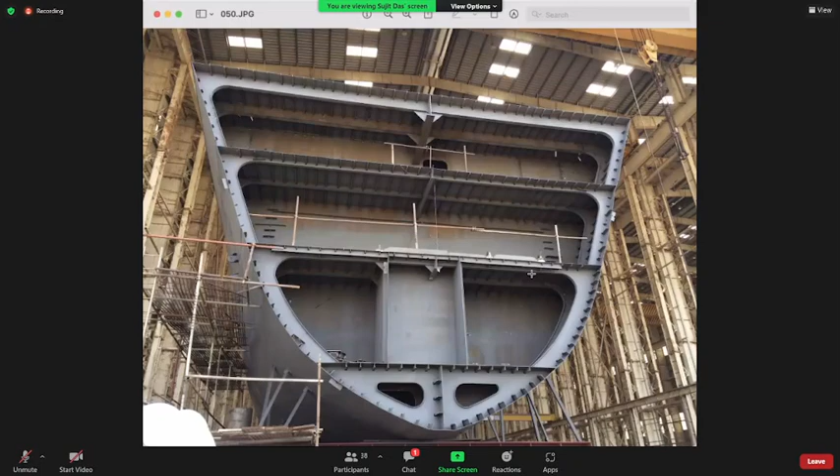Is this picture visible to you now? Yes, sir. Now, try to connect whatever we saw in that particular picture with this. The transverse member shown there is something like this.

Imagine this side shell as a straight bulkhead. If we imagine the side shell as a straight bulkhead, then this is a transverse member, which has moved from the side shell onto the deck. We can have different types of connections where a transverse member connects only the side shell, then a transverse member under the deck connected using a bracket. But in this case, they have taken the transverse member continuous from the side shell under the deck.

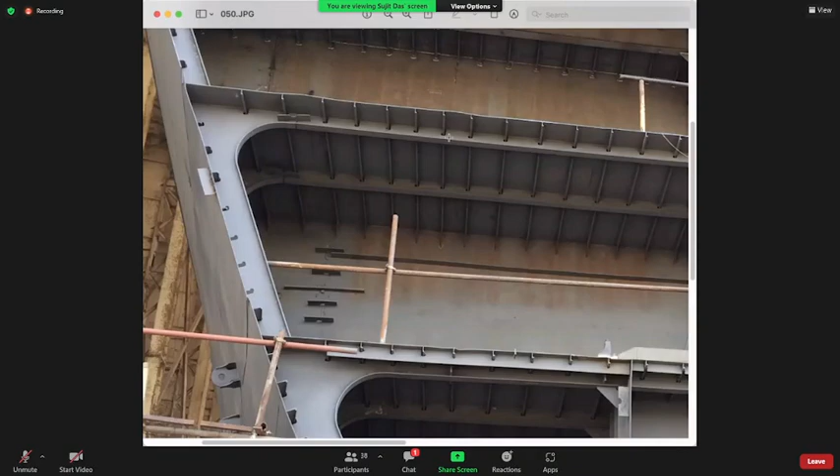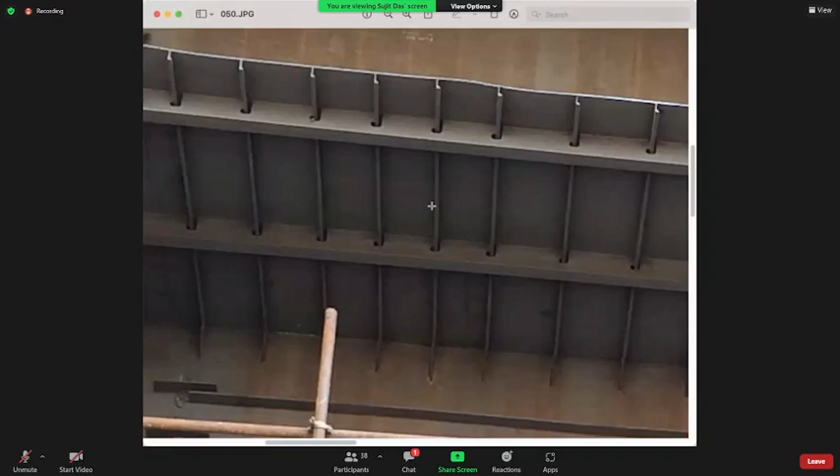Now this is a typical case. Let me show you, this is a transverse member passing, and we have longitudinals also passing, the deck longitudinals which we saw in the picture. So how do they pass through each other? They pass through each other. This we will see in a different unit, but since I have opened the picture, I'm showing you.

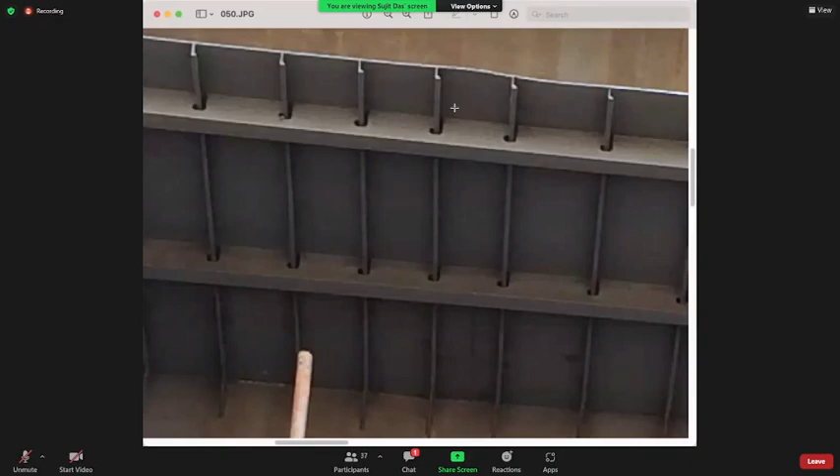The transverse members will have openings in them, called scallops. What other things can we notice here? In this structure, can you see my mouse pointer? Yes, sir. Okay, so this is the deck.

These little ones, I will zoom in, are the deck longitudinals, and the ceiling deck. Similarly for this deck, this is a girder. Now this was a defense class vessel, so it has different requirements. It does not have cargo holds, so it has a slightly different design, but the structural arrangements are similar.

You can see the transverse members. See, this is a bulkhead. This was supposed to be a compartment called an airlock. This is our vertical center girder, which we have shown, and this section is towards the forward side of the ship, which is why the bottom is so sharp. Towards the midship, the section will be slightly wider. So what you are seeing here is the girder, and this is our tank top.

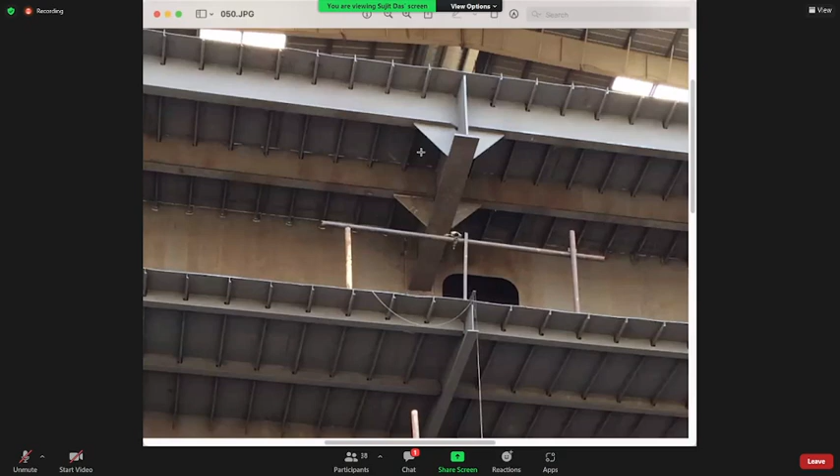Is it clear? Do you want to ask any question about this picture that you're not getting? This is the deck girder. Any questions on this? Do you want me to show any particular location in this? No, sir. Okay, one more thing I should tell you.

Always remember, suppose we have an arrangement like this, a transverse member and the longitudinals are passing through it. Merely having this arrangement is not enough. As we have already discussed, we need to strengthen the components, that is the side shell, the deck, but we have to ensure we have connections between them.

If you notice, you will see there is some plate kind of thing visible here, slightly, not clearly, but slightly visible. That means we have a plate connecting this transverse member onto the longitudinal member. See here also you can see there is no gap, we have connected. This was a block under construction and I took a photo, so everything was not complete, but you can see many details in this also. So we have such connections.

We'll come to that when we talk about bottom structure in the next unit. So this is about it. Should I close this photo? No questions then? No questions, sir.

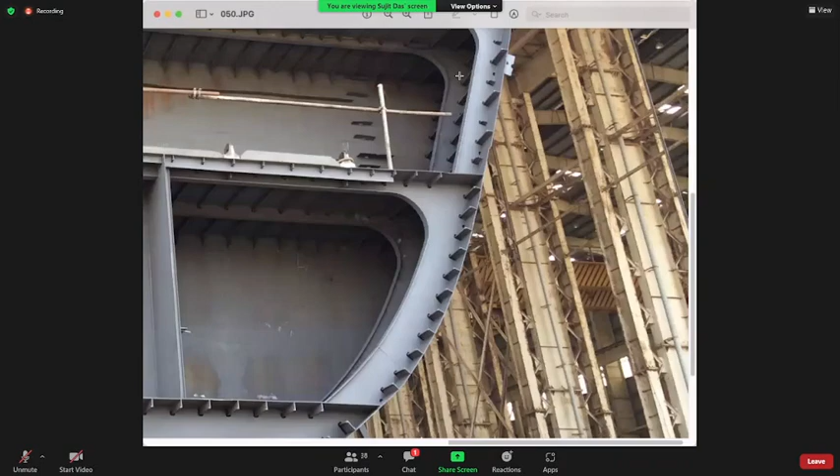I will stop this. Just a minute. Okay, this is what... let me come back to this.

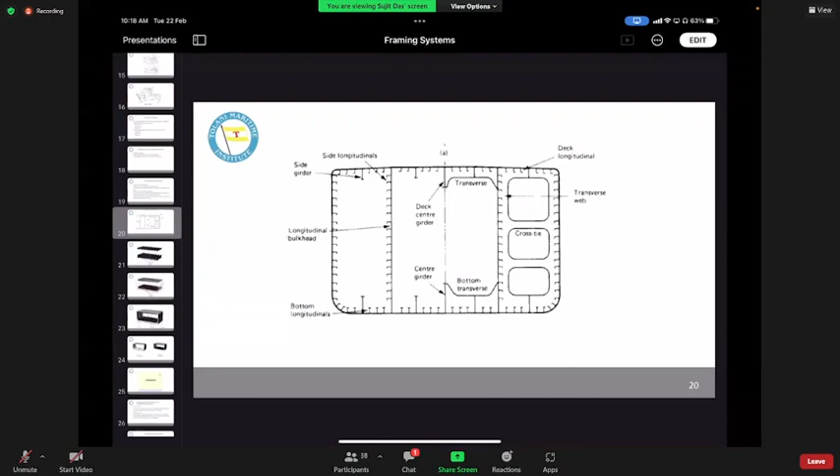So, I hope you are better able to visualize the structure now. You have seen the longitudinals, bulkheads, side shell, deck girders, bottom girders, center girder. Is it okay now? Is there any question anywhere? No sir, clear.

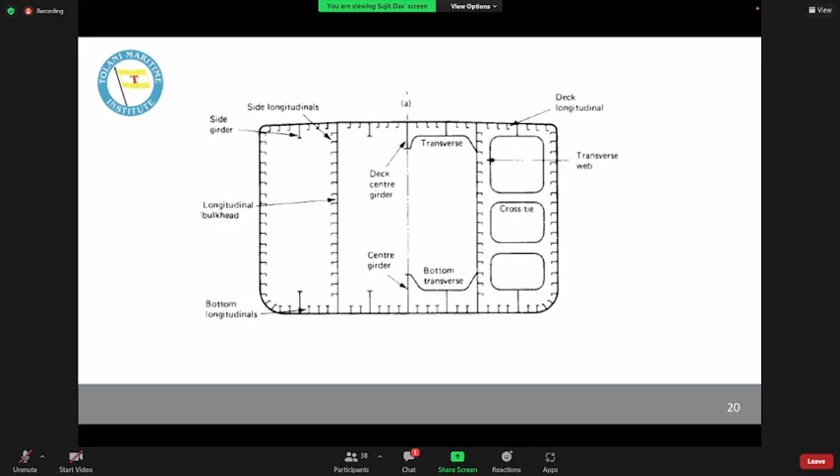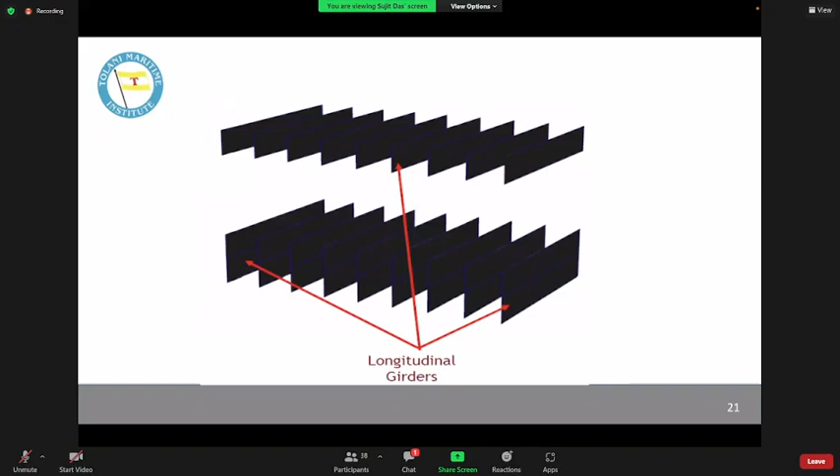Okay, let's move a little forward. Now this longitudinal framing with many girders, this is an approximate representation of it. We have lot many girders, meaning lot many longitudinal members, and to that we add quite a few transverse members. When the number of transverse members is less, they will not all be whole frames kind of thing. They'll be web frames, bigger in size because they are lesser in number.

Always remember this ring kind of structure will be there in all types of ship. Unless you have this ring kind of structure, you cannot arrest the racking forces. So this ring kind of structure will always be there, and in this case you have been shown the side brackets. We will also have brackets coming from the longitudinal to the transverse frame, which will be the beam knees. Though they are connecting the longitudinal member to the transverse, it will be referred to as beam knees.

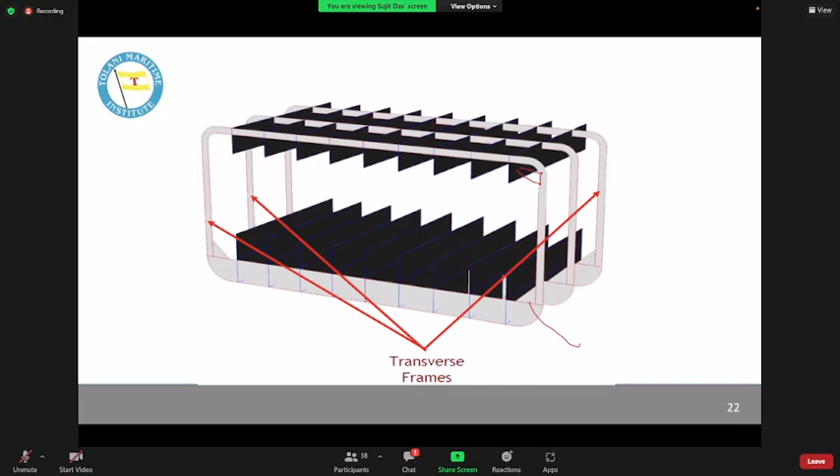So this is a typical representation of longitudinal framing. Now, what all differences did you find in the transverse framing system and longitudinal framing system? Can you point out a few differences between them? At least a few, just general observation. You must have noticed some observations, isn't it?

Yes, please ask. So is the transverse framing system more spacious? We discussed about it now. In case of transverse framing system, we have more bale capacity. Yes, a very good point that you have said. So we have more bale capacity here, let's see. Okay, we have more bale capacity.

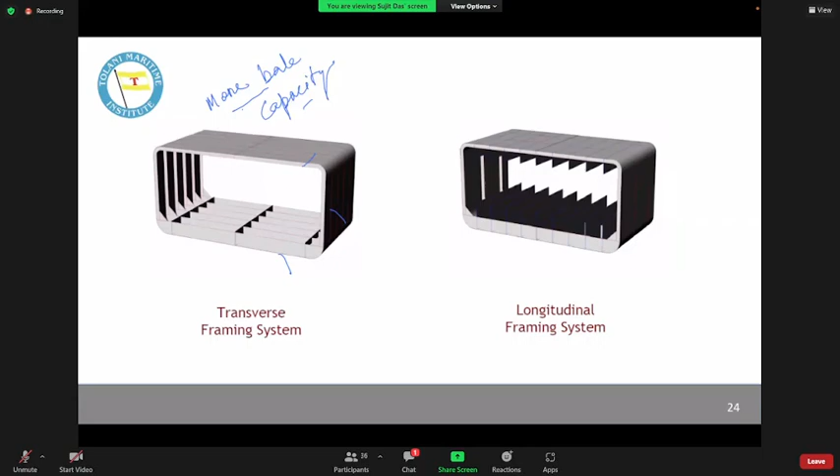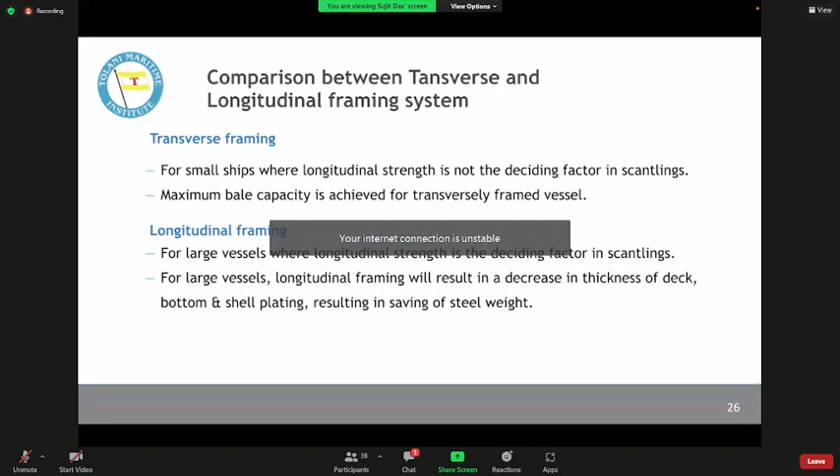So for transverse framing, we can use it most for short vessels, longitudinal for longer vessels, and more bale capacity for transverse framing. And in longitudinal framing, we are having lesser bale capacity. The third kind of category, the combination framing system, originates from this particular problem of reduced bale capacity. When we are making a ship, we always have to remember why we are making it in the first place.

What it does is it implements longitudinal structure or longitudinal framing in the double bottom and under the deck, because those are the long plates that need the longitudinal strength. And for the cargo space, wherever we are keeping the cargo, there we will make use of transverse framing system. In this way, we have taken care of the longitudinal strength required because the long slender plates are the bottom plate and the deck. So the bottom and the deck, we have done longitudinal framing on them, and transverse framing has been utilized for the side shell. This way, we have taken care of the longitudinal strength, and we have taken care of the carrying capacity of the ship as well.

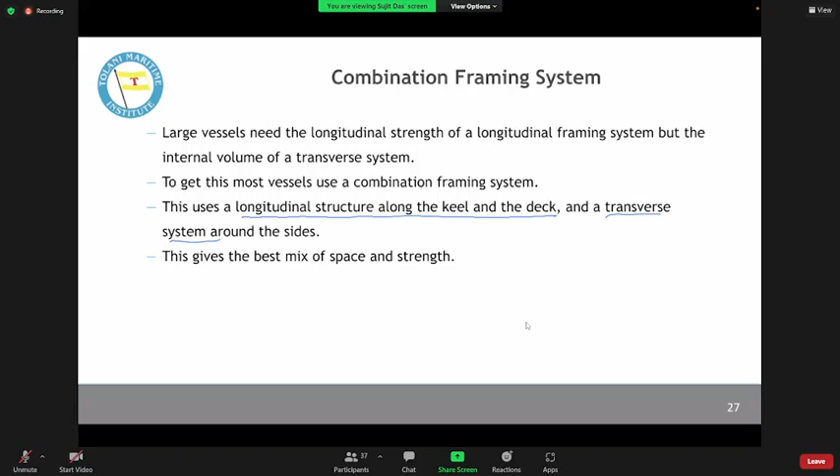This kind of arrangement you will find in case of large merchant vessels, not for the small ones, okay, or the intermediate ones. Let's see what we have there.

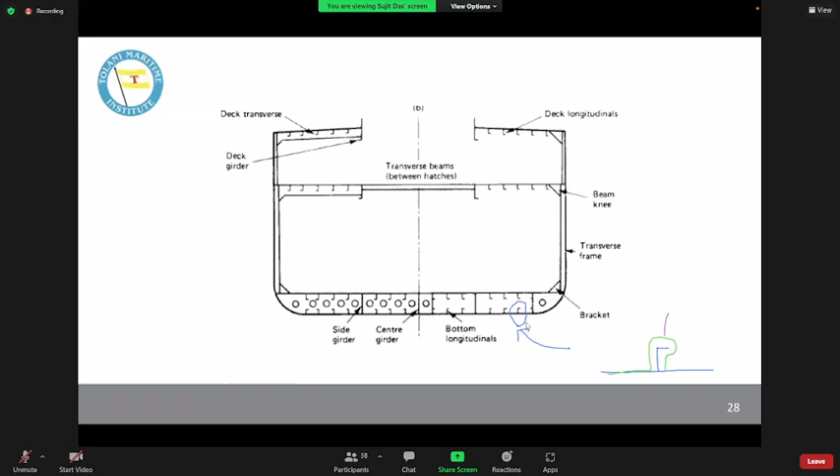Meaning, when this floor was built, it was cut in such a manner that it had a scallop. This kind of design is not very efficient because we do not have a direct connection between the transverse plate, that is the floor, and this longitudinal. What we will do is add a small plate in this manner. This little plate is called a collar plate, and this collar plate makes a connection between the longitudinal and the transverse member.

And this is applicable to all plates under the deck also. One more thing I should have told you - notice they have shown some holes here, but they have not shown those holes here. What is the reason for that?

The double bottom of a ship is utilized for carrying different types of liquids. Sometimes the double bottom, or the floor that we are representing, it may form the boundary of a tank. So as you can imagine, when the floor is forming the boundary of a tank, or the periphery of a tank, it cannot have any openings on it. Otherwise, how will it form the boundary of a tank?

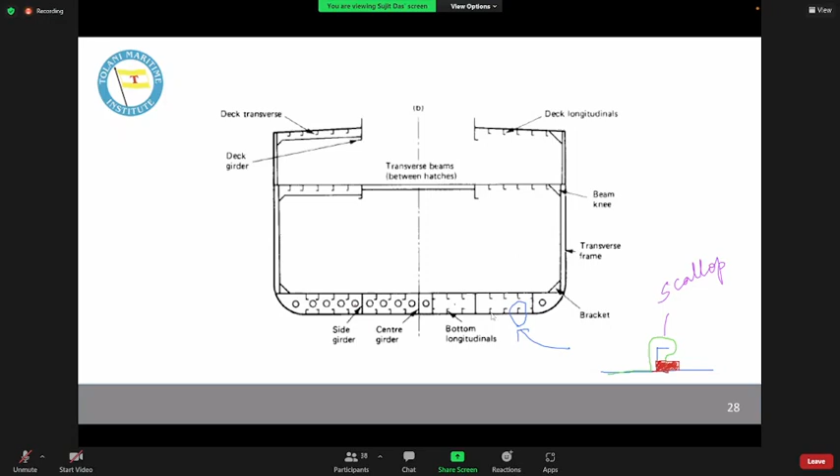In that case, we will not have any scallops or collar plates either. The longitudinals will have to get terminated there. In the picture that I showed, it was visible, I just did not speak about it. Do you want me to show you an example of that in the picture?

Yes, sir. Okay, let me show you that, then we will come to it. Wait... Okay, it is there, let me show you. Share screen. Here, we will not talk about the bottom here - the logic is the same. Let's talk about this part, or maybe this part.

Here you see the longitudinals are passing through the transverse member - they have scallops made for them. But when you look at this particular place, something important is here. Maybe a high fire risk zone on the other side of this bulkhead, which is why we have not made penetrations on this transverse bulkhead.

Instead, you see these longitudinals are getting terminated there. See here also, we do not have openings - we have filled it. Here we have openings. Is it clear?

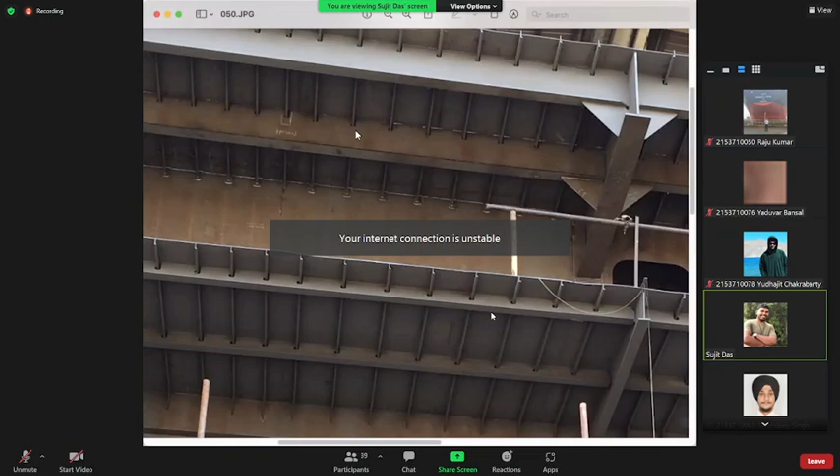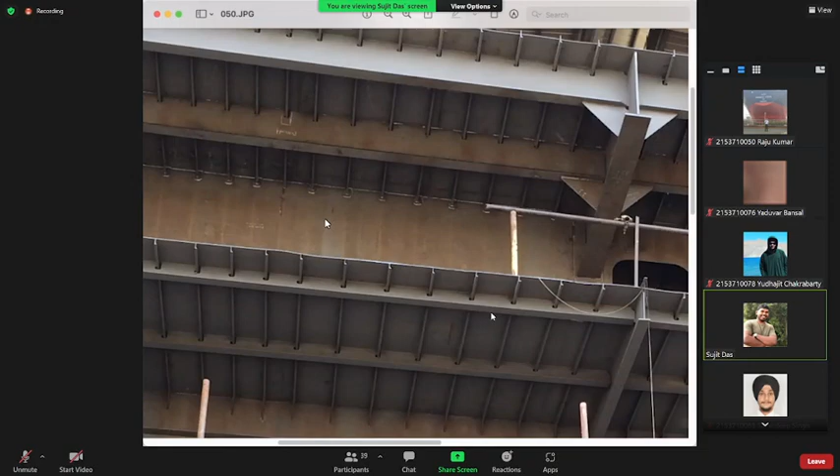And because I'm saying this floor is of this type - a solid one - it has no openings in it, it forms the boundaries, it is called a watertight floor. And whenever that solid floor has only a few openings, like for scallops or circular manholes, it will be called a plate floor. But you do not have to remember that now - it is a topic for the next unit.

The problem with topics in isolation is you cannot say you will study only the deck and not bother about the other members, because the concepts of deck and bottom and side are interconnected. That is why I'm introducing new topics, but at the same time, when we talk about the bottom tanks and structures, that is when we will start talking about different types of floors - there are three different types of floors.

The third one is visible here. So if I tell you, here also the collar plate, the little plate that is connected from the longitudinal to the transverse one. And as you can see, the vertical center girder has also some stiffeners added to it.

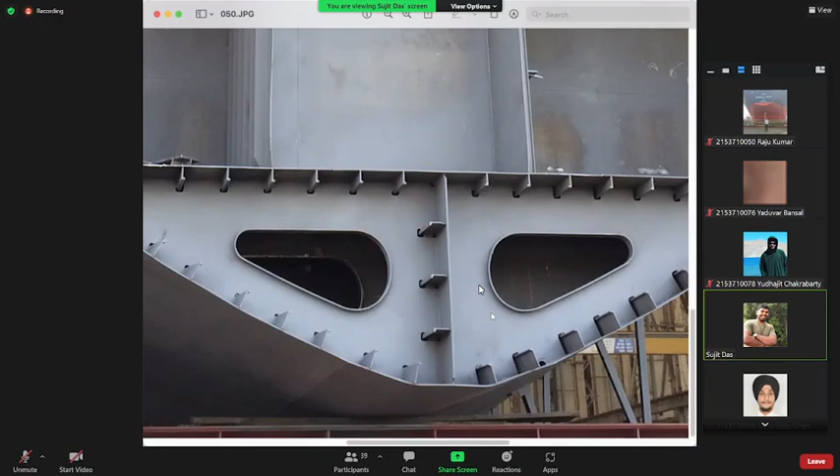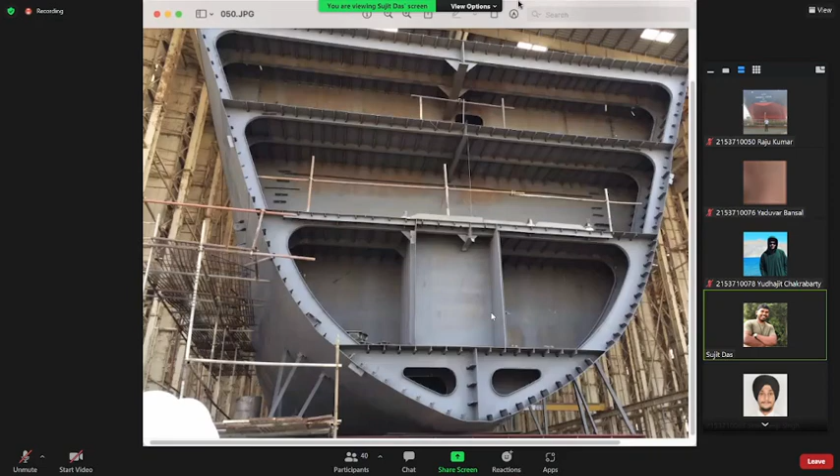So that's it, I will stop here. No, sir - will you be more comfortable if I stop asking you questions, or do you prefer me asking whenever you have doubts? No, sir, it'll be better this way, it'll be an interactive session. Okay, it will be better if I don't ask you whether you have doubts or not, right? No, sir, it'll be better if you do. Okay, okay, then that is what I will also prefer. So that's it about the structural aspect.

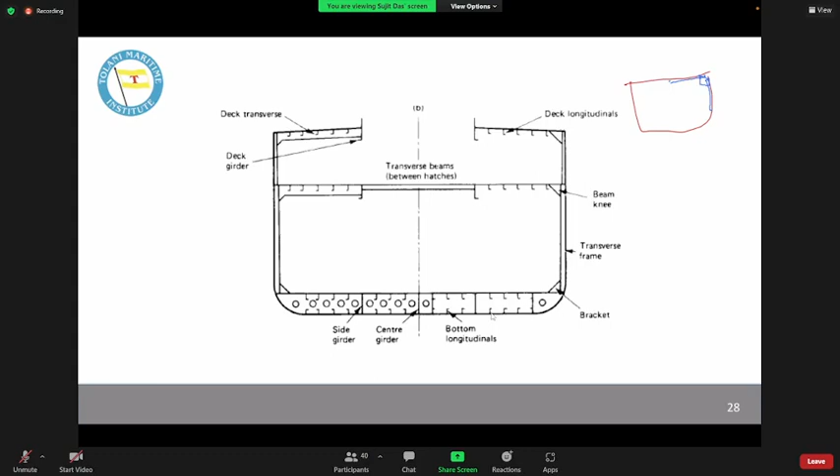Deck beam - suppose I have a deck, I'm seeing from the plan view. I can have two different types of beams. I mean, the same beam, same size, same thickness, we are not changing its dimension. It can be like this.

But sometimes we may have a hatch opening. If I have a hatch opening, the thing is I cannot take the deck beam from side to side. So now my deck beam will be kind of terminated at the hatch side girder. Is it clear? Yes, sir.

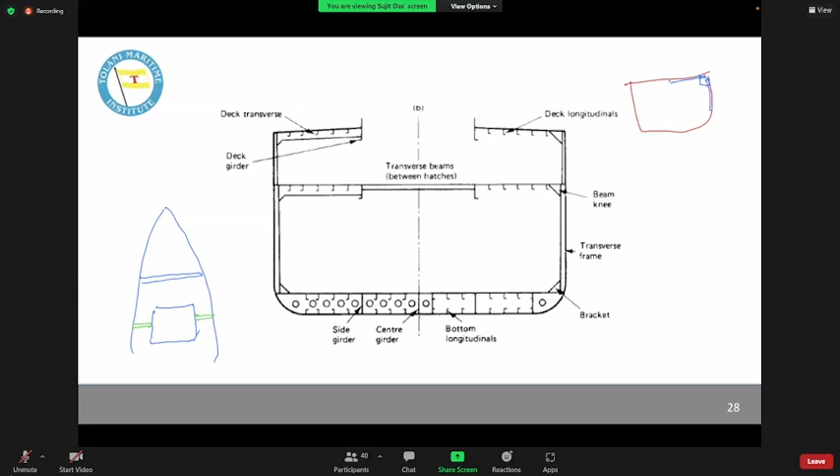Now, in such a case, the deck beam will be referred to as a half beam. We are not taking its length to be half, so we are taking half beam. But if it is getting terminated somewhere on the way because of the presence of a hatch, we refer to it as a half beam. Is it clear? Did you get this far?

Yes, sir. Okay. So we have discussed about transverse framing system. We have discussed about longitudinal framing system. We have tried to compare it. We have discussed beams. We have discussed half beams. We have discussed about side brackets. We have discussed about beam knees. All these topics, do you have any confusion anywhere? Because it has a lot of new definitions and terminologies. Anything that you want me to speak about?

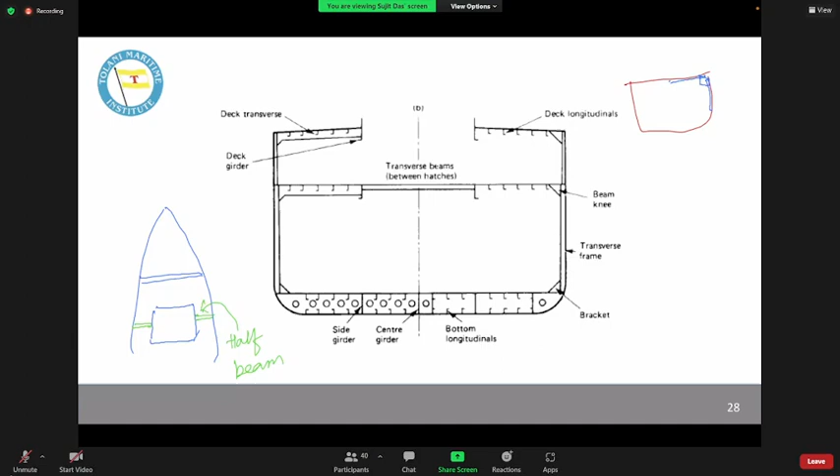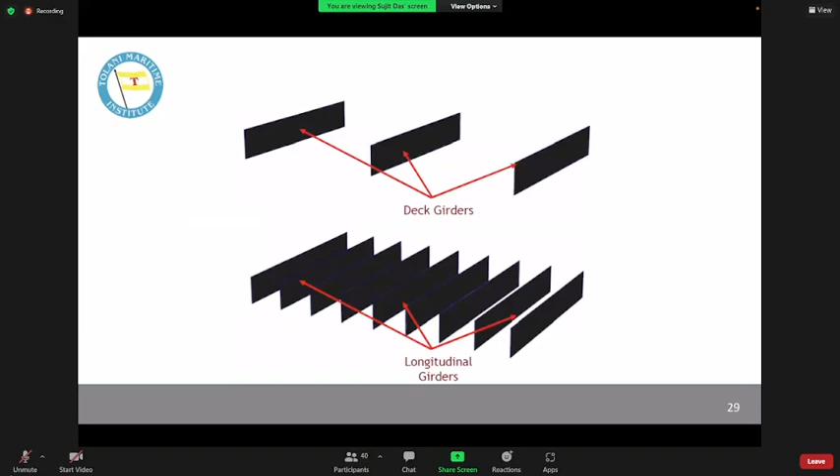Now let's move on and I will add a few more definitions because so far you have been able to grasp them. This is an example of combination framing. We have longitudinal framing for the bottom and the deck, and in the cargo hold region we have transverse framing. So we have taken care of the strength aspect because we have a long vessel. We have done longitudinal framing, and you can notice that in the cargo hold region, we do not have any longitudinal spacing. And here, the transverse region has also been appropriately shown - that is, we have quite a few hold frames and we have web frames at some intervals.

Now also remember, the way we are saying they are of smaller physical dimensions - those physical dimensions of a structural element have a name attached to it. It is called as scantling.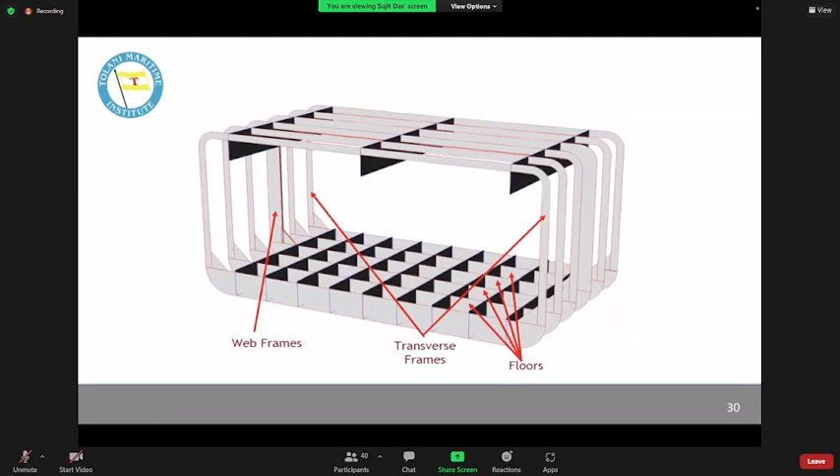Hey, who is that? Mute yourself, man. You all are in campus or at your homes? Campus, sir. Oh, you have your roommate with you then? Yes, sir, that is why.

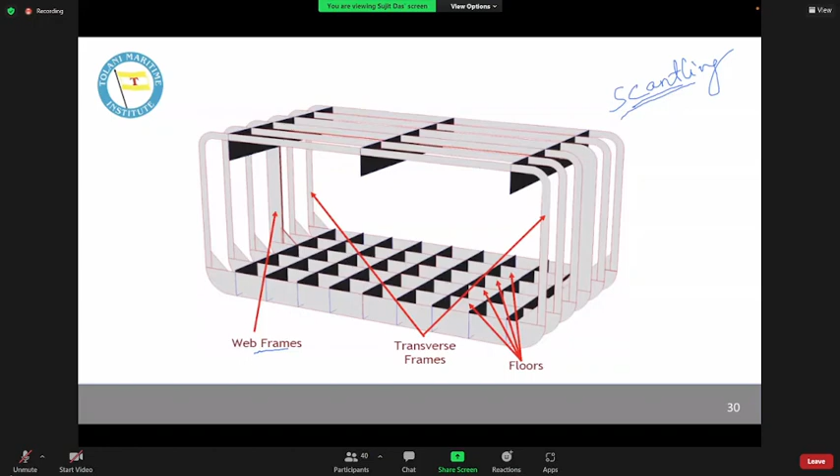So, yeah, it is scantling. When we talk about the physical dimensions of any member, we refer to it as the scantling. So I can say that the web frames are of greater scantling, the hold frames are of lesser scantling. Okay, this is one more - we will come to this also in some other unit, I believe. That is when we will talk more about the scantling details.

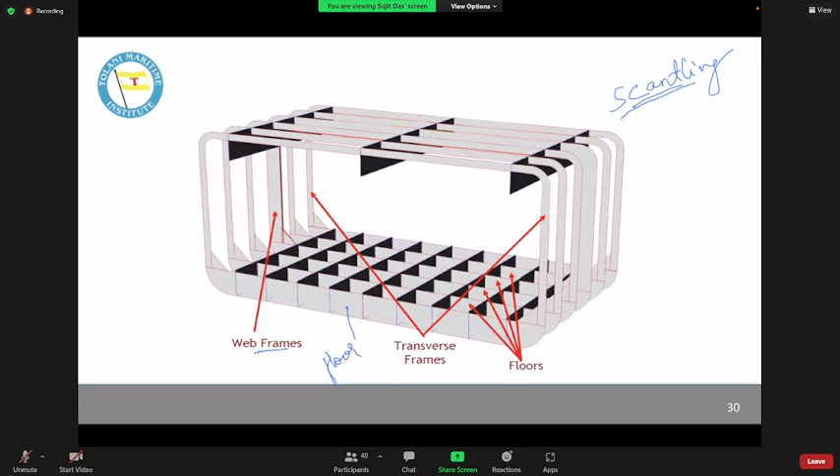So, with this, again just to revise, remember we have a ring kind of structure. For the ring kind of structures, the transverse member in the bottom is called a floor. The transverse member in the side shell - they can be hold frames or web frames. They all collectively can be called as transverse frames or side shell frames.

Under the deck, we have deck beams, and the bigger members will be called deck transverses. Okay, let me just write it - deck beams. Transverses have not been shown, I'm not showing. The bottom structure is connected to the side stiffening members using the tank side brackets.

And the transverse frames we connect to the deck longitudinal. Is it clear so far?

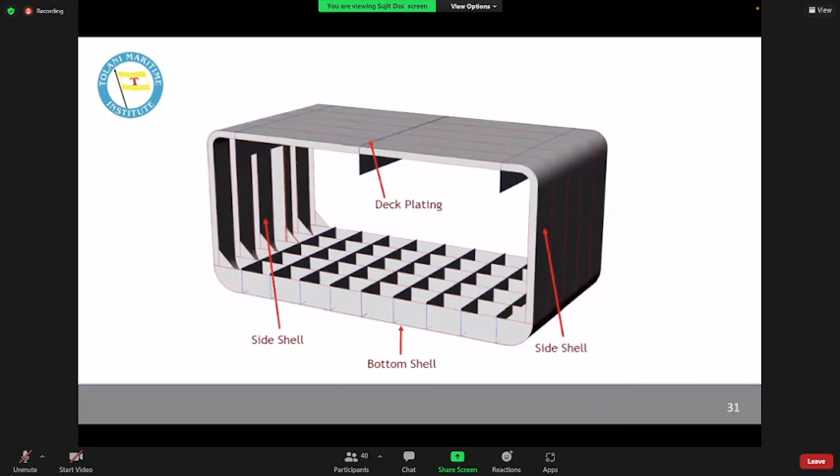Also always remember that these floors, wherever the center girder goes - if this is the center - was I writing it here? Yes. The floors will be kept continuous from center girder to side shell. So essentially, these side girders will be disconnected at every floor. And because of this property only, we are calling the side girders as intercostal side girders. Clear so far?

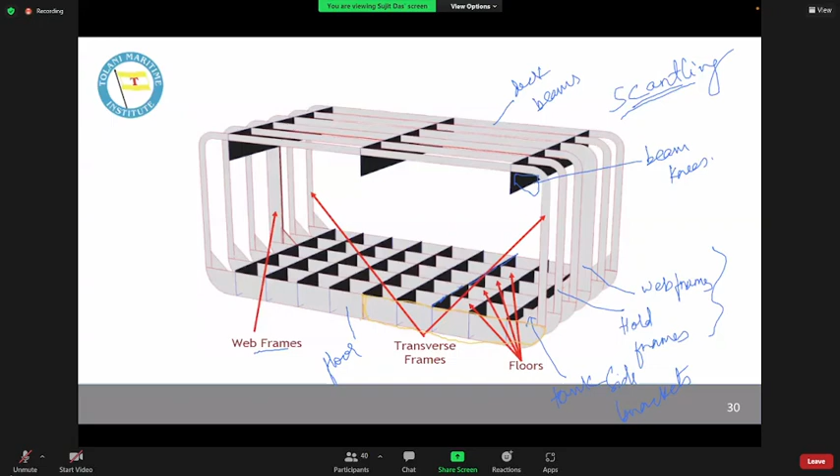Did I get disconnected? I'm back. How to do? I'm there. Are you all there? Okay, I hope you are not saying anything, I thought I got disconnected. Okay.

So this is about this thing. Any questions so far? No?